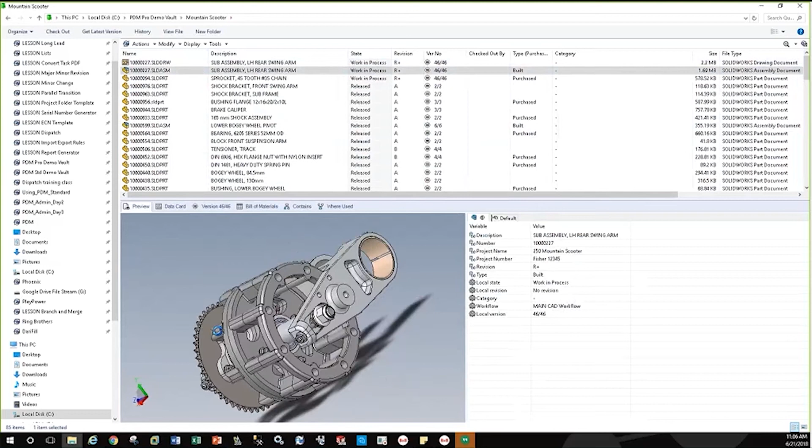I've got e-drawings at my back that says, hey, I'm going to open up this file for you and let you whirl it and twirl it. I can even turn on some tools and measure right inside this window. I don't even need SOLIDWORKS. I just need the client software installed, and that e-drawings hook is there, and I'm able to look at my files far more acutely than I could before.

So that already starts to help me find that information quickly. It's about finding it and reusing it. So we're starting to think about, oh yeah, probably some pains trying to find that data before. So we're starting to recognize PDM's here to help you with some of those pains.

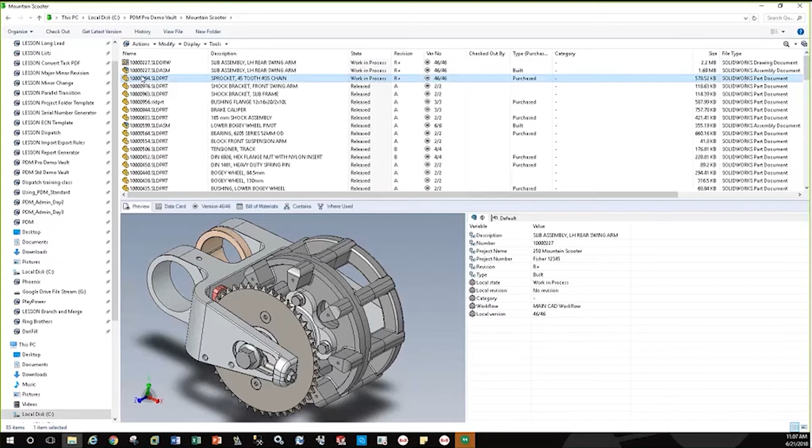Well, in this case, I've got these 3 files. I've already changed the state of them. I'm using a workflow process that says, well, these files aren't released like the rest of these files are. These 3 particular ones I'm getting ready to make a change on. I'm going to actually check them out.

So a simple click of the mouse, this window pops up, says, hey, you're going to check out these 3 files. Are you okay with it? And right off the bat, any other collaborative users, they don't even have to be over the cubicle wall to holler at me.

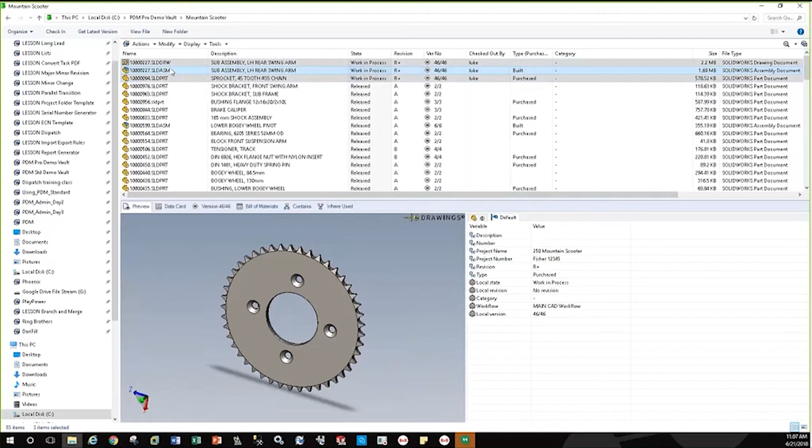They know that Luke's working on these 3 files. They're in a work in process state. Look at the revision—they went from an R to an R+. Everybody has no problem understanding who's working on files in this project folder.

If I pick on the assembly, I'm getting ready to make changes to these, but let's talk about this interface briefly. I'm looking at the preview, but I can pick on the data card, just as its name implies. It's a card, or as I jokingly say, it's like a sticky note carrying all that extra metadata, that important information about my files that maybe I don't want to put on my drawings. It's that intellectual property of how we do business.

Maybe there's extra attributes here, and like most customers do, we map your custom properties straight from your SOLIDWORKS parts, assemblies, and drawings right to these data cards. These data cards are customized for the different file types and different locations in your Vault, because it's trying to give you an easy-to-use, pleasing interface.

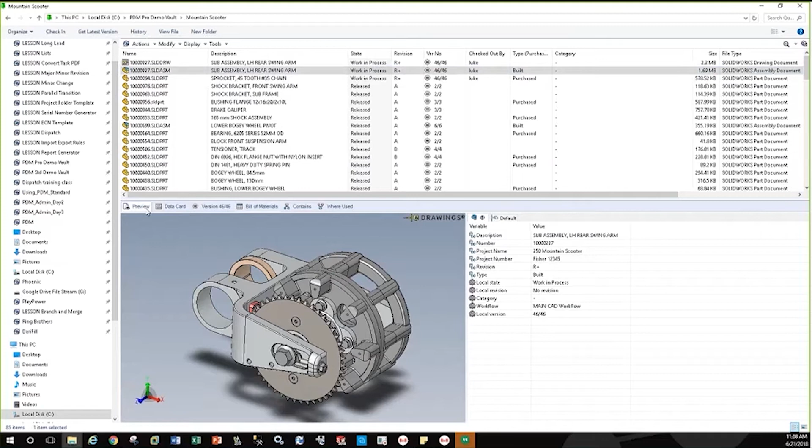I can click on a Bill of Material tab, and at a glance, I can see a bill of material for that assembly we were just looking at. If I pick on the drawing, there's a bill of material table on the face of that drawing. That table says, because there's a table, PDM will sniff that out and put that bill of material table right up on the screen for you.

You could now modify that BOM table in the face of your drawings for consumables out on the shop floor, to give you a truly manufacturing representative bill of material. Then this bill of material on that drawing would push through to PDM, and with 2 clicks of the mouse, I could have that BOM up in Microsoft Excel.

It's pretty nice. I could export this to our ERP system, or maybe I just want this to start a project spreadsheet and start building from here, working with purchasing to start figuring out where these parts are going, who's making what out on the shop, what's going to be built in purchasing or by other vendors.

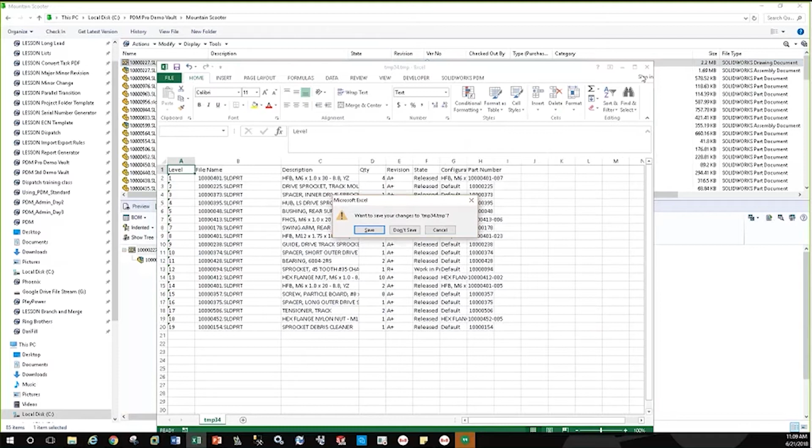I could even go so far as to come over here and actually compare bills of materials. Right here, I can compare 2 different bills of materials. Why? PDM keeps track of all my history—I don't lose that history. That granularity is kept. How am I working on the latest version? Do I know it's the latest version?

What version is it? Well, we're going to take a look at history in a few minutes after we make some changes to some parts. But let's go ahead and do that. So I've got these 3 files checked out.

We'll go ahead and open up SOLIDWORKS quickly here. Once SOLIDWORKS fires up, we're going to use our normal tools that we're all used to, to navigate to our Vault environment and open up our files. So normally you're used to navigating to files through a network folder. Well, my vault is still just like a network folder, so it's nothing more complicated. I'm going to say I want to open a file.

Oh, I don't want to work on that vault—it's asking me to go to that vault. I have several vaults on my machine, but we want to actually go to our PDM Pro Vault. That's where I'm working today's webcast, and we're going to go right into that particular folder. Move this screen over a little bit.

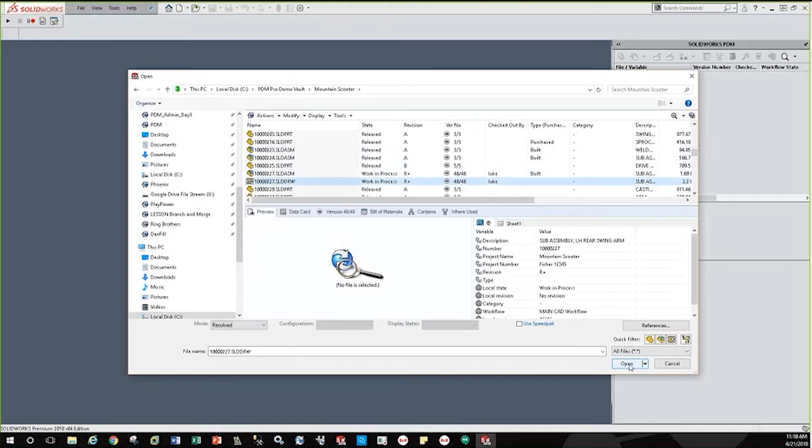I'm going to head into the drawing. I like to always start, as I say, top down. So we'll open up the drawing in SOLIDWORKS. Notice while the drawing's opening, we've got a new task pane over to our side. With PDM, you get what's called a SOLIDWORKS PDM task pane. So let's watch what goes on.

Everything we've been doing so far has been in a Windows Explorer interface, but over here, now we're working inside a SOLIDWORKS environment where my users can stay focused in here. They don't have to bounce between Windows Explorer and SOLIDWORKS. They can stay right in SOLIDWORKS and get in the zone, and they can interface the vault over here.

So for this quick change, I'm just going to add some lightener holes to the part, and PDM's watching what I'm doing. I'll go ahead and save the changes, and over here inside PDM, I can just click the mouse and check in the file.

I get a window that says, hey, you want to check in these parts? Sure. I'll say I added lightener holes, keeping some comment history going, and we'll see that play out here in a moment. But I'll go ahead and push those changes through.

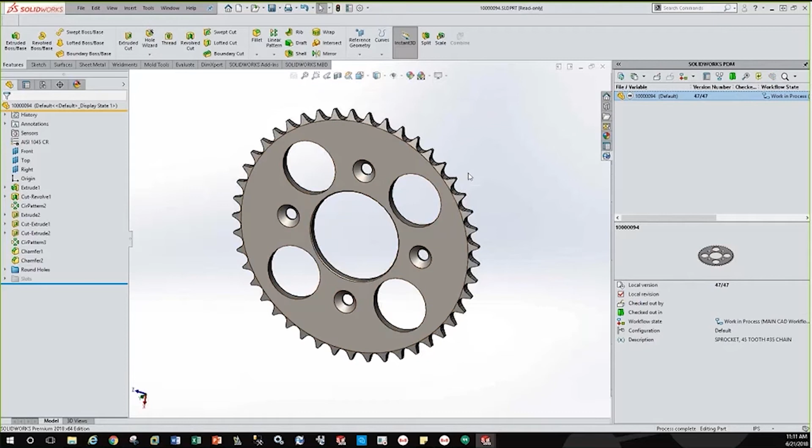I'll go ahead and save those changes. It says, hey, I've updated the assembly to reference that latest sprocket that you just added the holes to. Well, maybe I don't check it in from SOLIDWORKS.

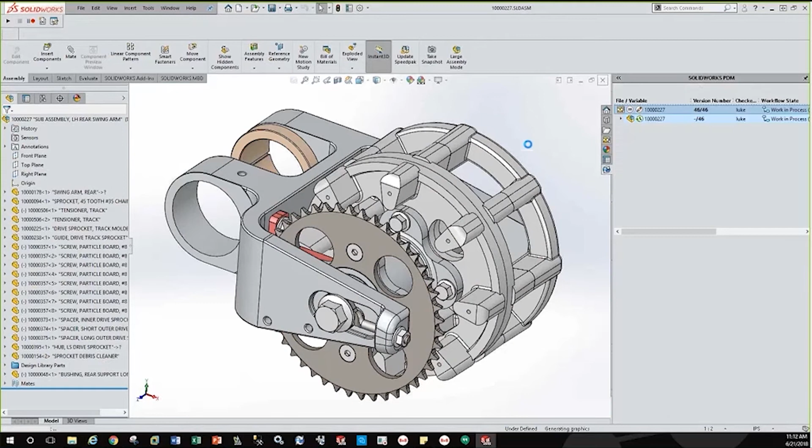In a real world, we all know that once I'm back here to the drawing, I should be doing some work on a revision table, noting in the change history what's going on. Maybe I've got to do some balloons out here because the bill of material possibly changed. But let's say I already made all those changes.

Again, I'll save the drawing. Over here is where I can watch and check in those files. So maybe I'm done at the drawing level now. Let's go ahead and check those in.

So I get another screen that says, hey, I want to check in both these for you. You done updating them? Sure. It's trying to think with me. So I'm going to say, you know, maybe I want to say updated per details.

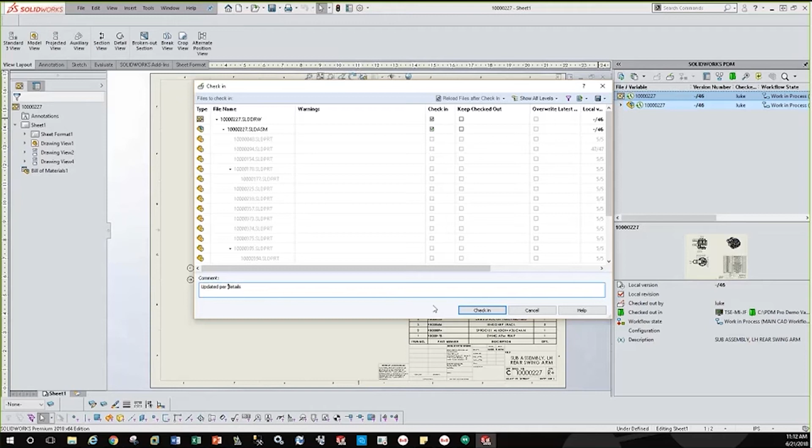And again, we'll see the comments play out here in a moment. I'll put a space in there. We'll go ahead and check in those files.

So PDM's been helping me through the task pane over here, navigate through my data and work on my files. But it's been pretty seamless. It hasn't interrupted anything I'm doing in SOLIDWORKS. So I'll drop out of SOLIDWORKS and we'll come back to our vault view.

When we come back to our vault view, we can see I don't have those 3 files checked out anymore. We can see that Luke isn't working on them. So that collaborative environment, people are feeling pretty comfortable about. But now I want to push the changes through my workflow.

I want to actually release them. We can see they say they're in work in process. I've got a pretty simple workflow that I've set up for this demo vault.

So I'll go ahead and say I'm going to submit these files for approval, and I'll go ahead and push them out. It says, please enter a comment. Oh, I forced my users, my designers, to enter comments. And maybe I'll say ready for review.

And I'll go ahead and say okay. So now these files, notice they changed state. So they're waiting for pending, they're in a pending approval state.

Now, I was logged in as Luke. He was a designer working on the files. So I'm going to have to, for demo purposes, log off of the vault. So bear with me, I've got some difficulties on my side here. Let's move that. There we go.

So I'm going to have to log off my vault as Luke, and I'm going to have to quickly log back into my vault as a manager. Let's say I'm logging in as an engineering manager, so I'm going to go back into my vault, but this time I'm going to log in as Paul. Paul's the boss that's allowed to approve my files.

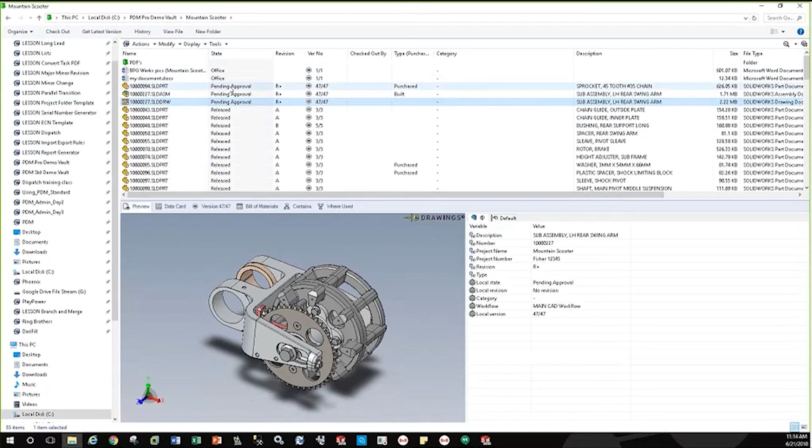So he's feeling pretty comfortable. He's using that state column as kind of a dashboarding tool. So again, it's supporting the revision and collaboration issues I've got. I come over here and I just release the documents quickly, and again, I get another screen. I can enter a document notice in there.

So let's go ahead and say I approve in the comment field. Things are looking pretty good. I'm feeling good. Let's let PDM push those files out the door.

So PDM does a couple things behind the scenes. It's going to go ahead and run a PDF for me. It's actually going to open SOLIDWORKS, and it sees that a drawing was released in this package of 3 files, so it's automatically in the background going to make me a PDF and push that into my vault, as well as you can see the state's been changed on all 3 of these files, and the revision has jumped all the way up to revision T.

We skipped over S because that was a revision letter this customer didn't want in his scheme. It's a letter he avoids because obviously it looks like 5. So it can be misconstrued at times.

And again, these columns, I can manipulate them and do anything I want. So in the background, the PDF was being made for us, saving those redundant chores and eliminating that effort from our engineering staff or anybody. So I love when PDM does that for me. As I say, it's beginning to pay me back. It's a return on my investment.

So what have I seen? Well, let's take a look. Maybe you weren't watching the demo. Maybe the manager says, well, what happened to those files? Did you make that change the other day? Well, the manager can come in here, right-click on the files, select history, and see where we started the demo at R, and moved through needs revised per ECN.

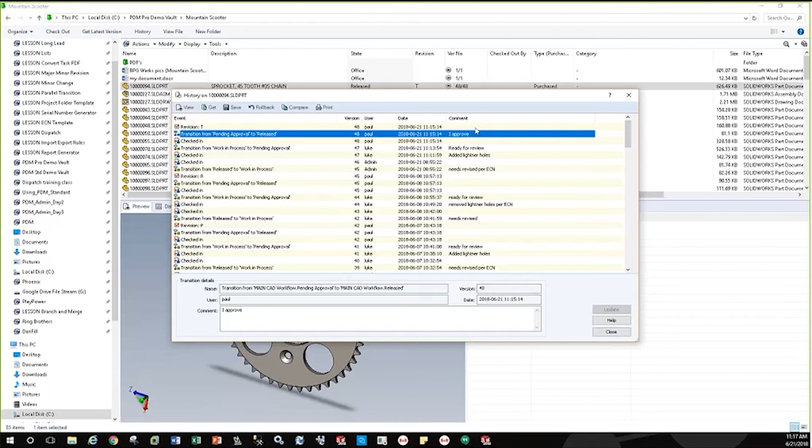I've even had customers use this during an audit trail if they're going through an ISO or a TS audit. So it comes in pretty handy just to specifically see that. And you didn't have to do anything. PDM kept track for you. All you had to do was maybe enter a few comments to help build that information database.

Over here, we saw the files were released, and matter of fact, while we're here, let's go take a look. There is our revision T of our drawing, where it actually made our PDF and put it back in the vault. So maybe this is where production can actually come to the vault and see those files.

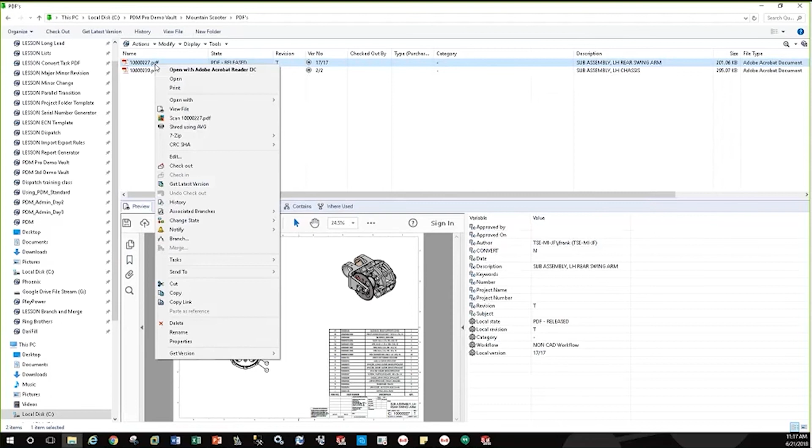And just like anything else, the history is still there. It's not lost. There's our old revision R of our drawing. There's revision T, the latest one we released. History is never lost with PDM. We always maintain that history and track it because it's just as vital as that current intellectual property that we're keeping track of.

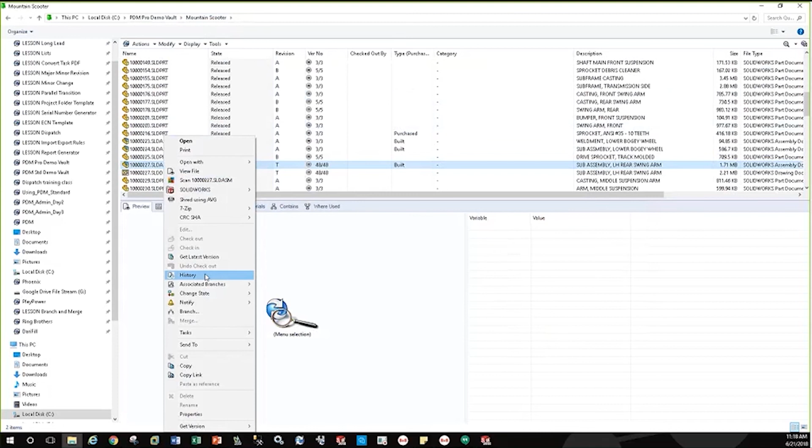So we see it in the file, we saw it in the part file, we saw it in the PDF file, and if I were to even come down here to the assembly of the drawing, right-click, select history, that information is there.

Maybe you wanted to see the part beforehand. Well, we know what the part looks like now. We click on it and do a preview of it. Let me click on that file. Oops, I double-clicked it. So I click on it, well, there's the assembly with the lighter holes in it. But let's say I were to actually right-click on that file and say I didn't know it was something as simple as lighter holes. It was far more complicated.

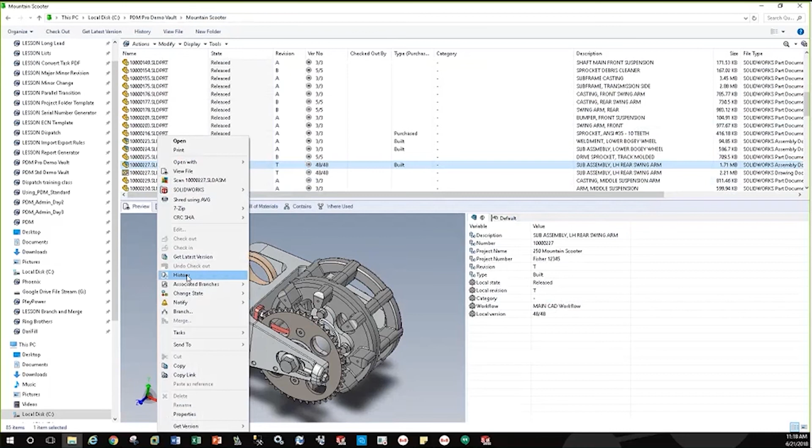So I couldn't graphically catch what was there. Maybe it was the number of teeth in the sprocket or something like that.

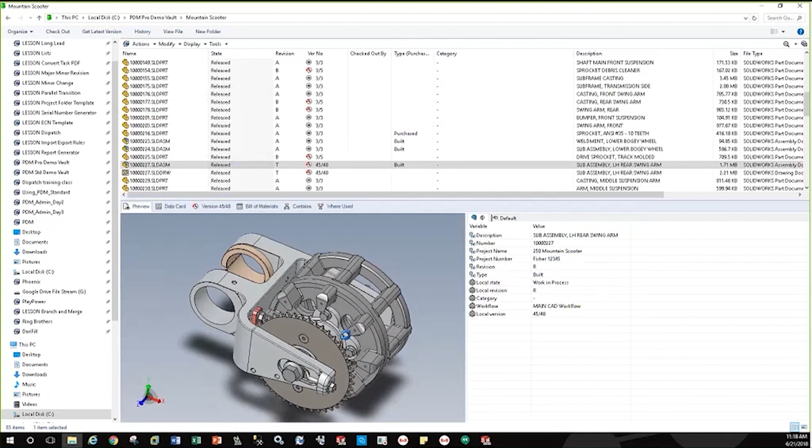I select history, and I come down here to revision R, and I say get. Because I have permissions, it's going to roll back the hands of time on my machine and say, hey, I'm going to roll back the hands of time and go take a look at that stuff. And when I hit close, the assembly reverts back to what it was before I started the demo, before I started processing that change.

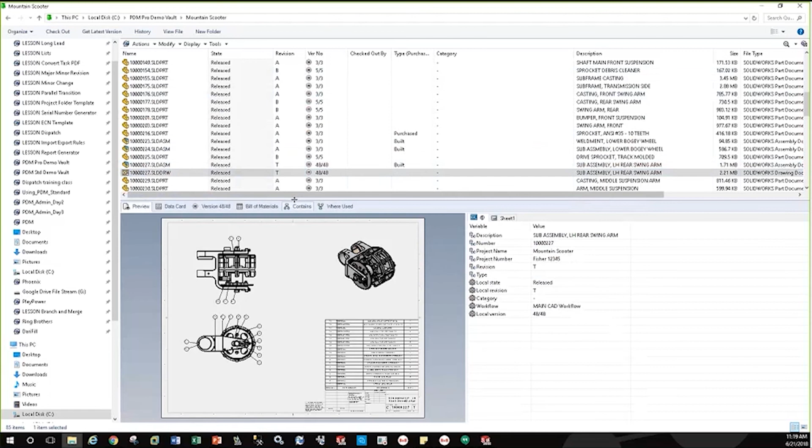Of course, PDM's smart enough up here. You can see the icons have changed, and it's keeping track on my machine, not up on the server. I'm not erasing the hands of time and changing the information, because at a simple mouse click, I can say get latest, and a screen pops up and says we'll roll those hands of time back forward to current time, and now we're looking back at our assembly at where it should be with the holes in it.

So again, what have we seen here? We've seen how it supports collaboration. At any time, a user can glance up here and see who's working on a file and what the state is of the file. So I get an idea of what's going on with my data in my project or as a team.

It obviously supports revision control. We watched our files go from R to T for the revision column. It did that automatically. I didn't have to control that. It pushed it through to the face of a drawing. Boy, that makes it pretty easy.

We don't have to worry about that with history giving us the wrong version of a file out to the shop floor. Then we threw a little bit of tasks in there to give us a nice quick return on our investment. So it really starts to show us why PDM can help us manage that intellectual property.

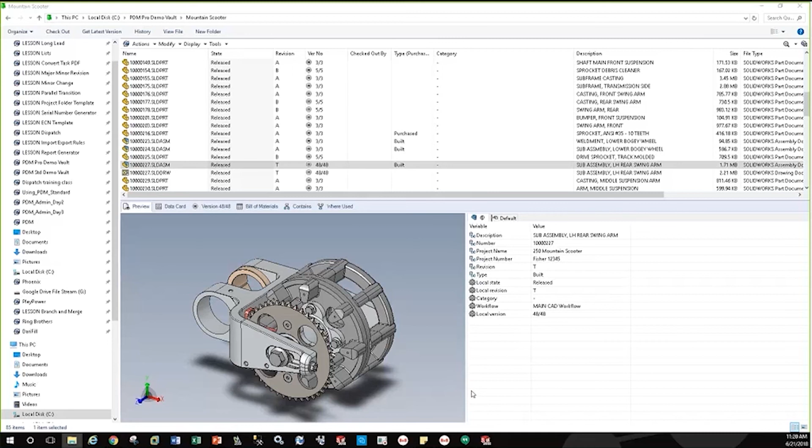How can it help us control it? So let's come back to our PowerPoint slides. We've had a quick look. We've got a little feel for some key pain points that we're probably up against with this intellectual property, starting to appreciate that, yeah, it does mean something to keep this data under control. It should be housed in something far better than just a Windows folder environment, where we get in trouble too many times, and not deliberately.

But let's talk about the process. So what is this process? Well, Fisher Unitech has a process that I don't want you to walk through by yourself. I want you to appreciate how we are going to walk this PDM path. So here's my analogy. I love analogies.

Look at this rope bridge here. What's wrong with this bridge? Well, it's got a solid floor. That looks like some pretty new galvanized lumber down there. I'm not afraid to walk on that. Ropes are fresh and tight. That looks pretty good. It gets me from point A to point B. I'm going to cross over that little stream there. The water doesn't look like I want to go wading through that.

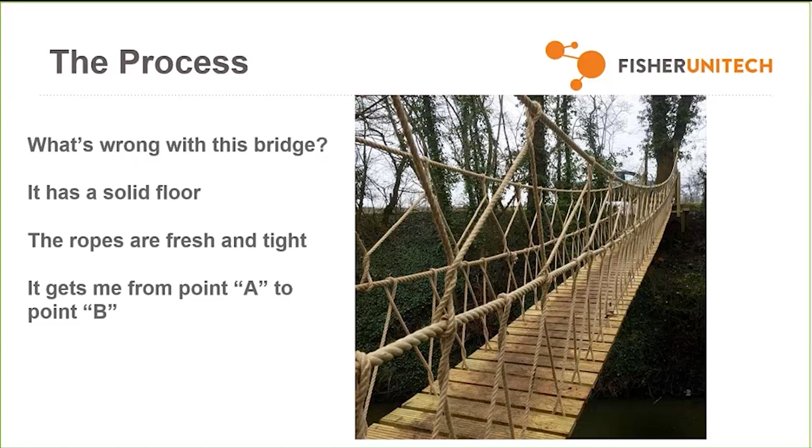But you think your wife and kids are going to walk across that bridge with you? Yeah, come on, Dad, let's go across the bridge. Yeah, everybody's going to walk across that with a little nervousness, and heck, my toes are even tingling just thinking about it. Well, there's nothing wrong with that. It's a solid bridge, but I'm a little nervous.

It has a clear definition. There are no concerns about the path you are on when you walk across this bridge. Both of them got you from point A to B. Both of them had a bottom. Both of them had the sides. But that's the difference between how we do business when it comes to PDM and how others do. The last thing I want you to do is be concerned about the PDM process. How are we going to walk that process?

So it starts by you picking up the phone and saying, the reason why I got on this webcast is because I'm having some pains, some concerns. I think I should be using PDM or something to help me manage. I need a strategy. I need to strategize how to do that.

Well, pick up the phone, give us a call. We'll do a discovery call. We'll feel your pains, help you appreciate and understand those, and then do a tailored demonstration. You'll see a file set like mine, or maybe a file set you send me, some sample files, so you see your unique files in one of our vaults, and we actually run them through a workflow. We'll talk about workflows and figure out exactly what you need to see PDM do to feel comfortable and knowledgeable.